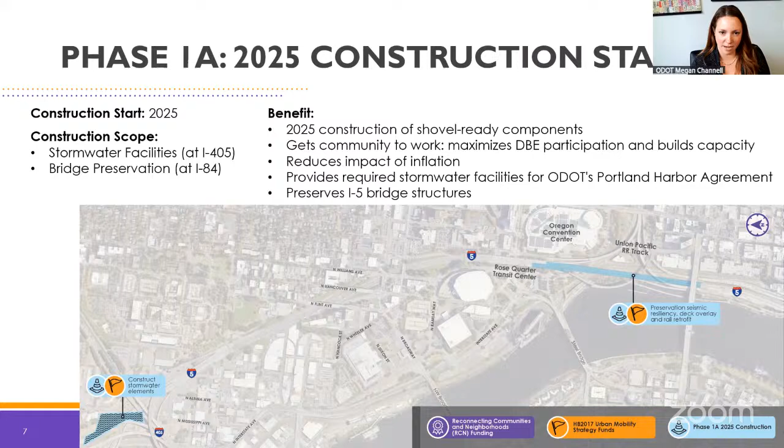On the next slide, the $250 million, or a portion of it, from the commission, in addition to phase 1A, would also fund what we call phase 1, which would follow on the heels of phase 1A, starting in 2027.

This is where we start to compound the work that would be done with the Reconnecting Communities grant. That grant focuses on the first portion of the highway cover at Broadway and Weidler. This additional funding would put some funding into the highway cover, and also implement I-5 mainline improvements with the full southbound auxiliary lane and a portion of the northbound auxiliary lane.

Coupling this work together allows us to build more of the highway cover, and from a constructability standpoint, it's a lot more efficient, reducing impact to the community and traveling public as we construct this all together. So I just wanted to reground HAAB in what the current funding provides us.

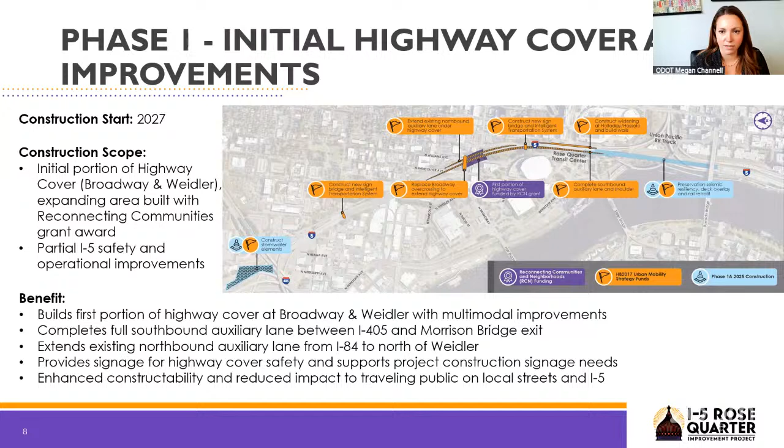On the next slide, I want to zoom in. This image is a plan view of the highway cover area, overlaying against the work that our HAAB did with Albina Vision Trust, looking at how the highway cover and adjacent lands could be utilized in the future for that long-term development and vision in alignment with community.

This is outlining the area of the highway cover around Broadway and Weidler that is funded through the OTC funding, or House Bill 2017 funding, and then the Reconnecting Communities grant. You can see the parcels on cover between Broadway and Weidler, and some of the parcels off cover that would be included in that funding.

So I just wanted to transition that to what it means from a future development opportunity as well.

I'll pause for questions after one more statement: despite these phases being focused on parts of the project work, we still at ODOT, to our highest level with our director, remain committed to delivering the project in full. We see this as a step towards that commitment, recognizing that as funding becomes available, we'll be phasing in the rest of the project, but we stand committed to deliver the project in full.

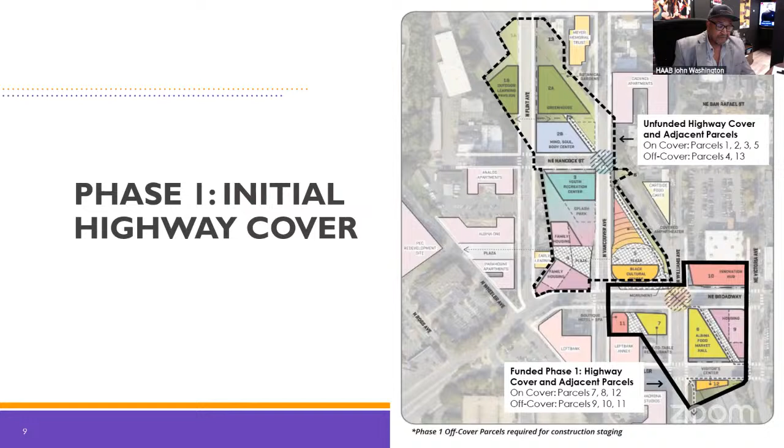Thank you. Any additional questions for Megan before we move forward?

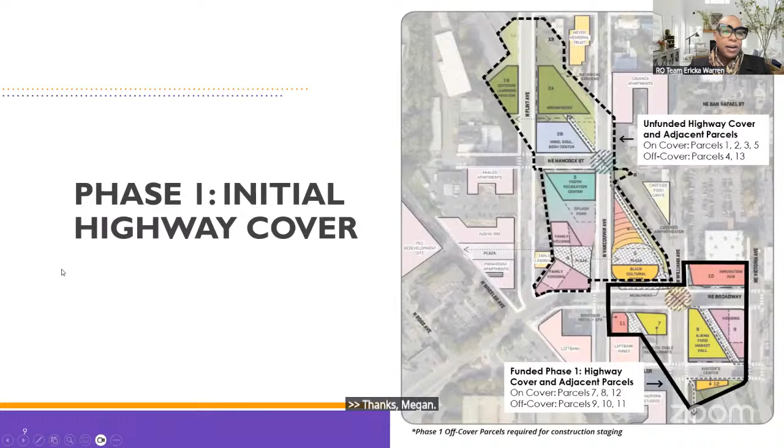Thanks, Ericka. Good evening, everyone. For this, let's go to the next slide. I'm actually going to share this space with Mike Saratella to describe a little bit of a summary of what occurred at the kickoff event for the Reconnecting Albina Planning Project.

Cool. Thanks, Rachel. Good afternoon, HAAB members. I'm Mike Saratella, Senior Planner at the Portland Bureau of Transportation. Many of you were at this event, so I may call on you to share your own impressions and takeaways from that event as well. I saw a lot of HAAB members and folks at the meeting.

On February 27th, about two weeks ago, we held our kickoff event for the Reconnecting Albina Planning Project at Tubman Middle School, just right north of the I-5 Rose Quarter project. It was a great kickoff event. We had a couple hundred people show up, and it went throughout the evening.

We had speakers, both from community leaders, elders in the community, city staff, and it was a chance to really see all these pieces come together, right? So the transportation investments that PBOT and ODOT will be making, as well as private development and building out that street grid, development opportunities on the cap and through the PPS site and other opportunity sites in the area.

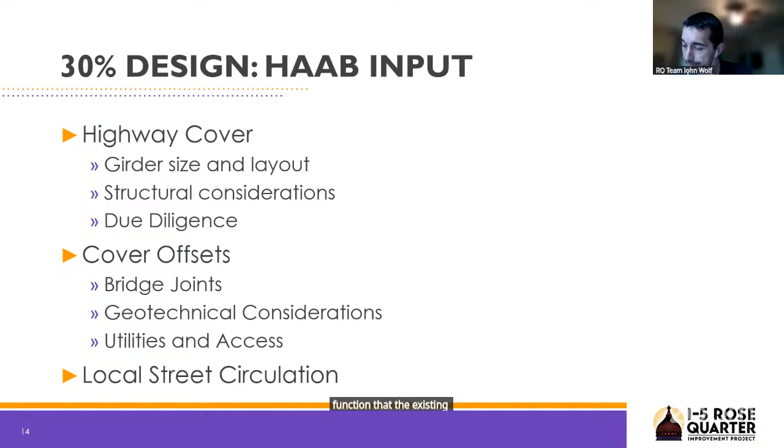If we can move to the next slide - we'd like to acknowledge that as we continue to move the design forward, we're going to continue taking some of this feedback and input we've received, as well as the project values, to help guide additional design decisions in a few key areas.

First being the pedestrian and bicycle bridge aesthetic input as we look at the new connection across I-5 - that pedestrian and bike-only facility across I-5, and how we can use that as a new connection, as well as an attractive facility and opportunity to really reinforce this new community and district.

The tunnel portal aesthetics - as we start thinking of this new structure across I-5, what are some ways that we can blend and optimize the look and feel and aesthetics to create that unique district as we come through the project area. Then we'll continue our conversations around cover use and looking towards that interim or near-term day-of-opening condition that we might want to be designing our highway cover towards.

And then lastly, continuing on local street designs as we move into final design. Up until this point, we're trying to set the key building blocks, the major assumptions that make up our transportation network and the area around, defining our area of impact. As we move into final design, we'll refine and develop the details of those streets and how they complement those intended community uses.

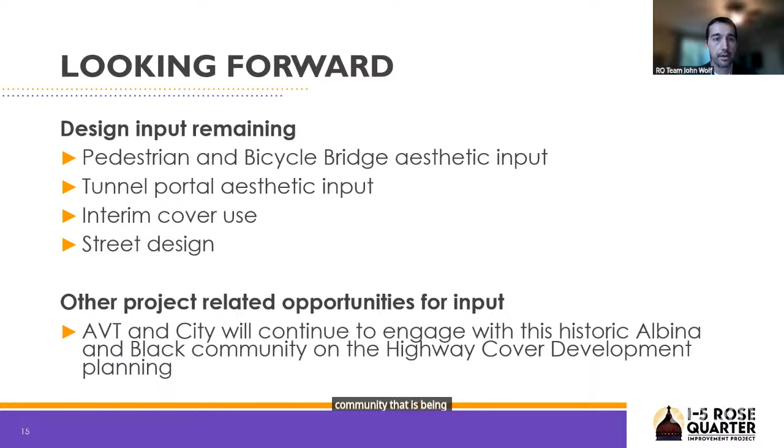If we go to the next slide, we have two main points we wanted to circle back to with this group today: first, our ramp design progression and what we're referring to as an avenue design option, and then a bit more on refinements happening around the bike and pedestrian connections.

We've previously discussed with this group a two-way Ramsay Way design option, in which some ramp traffic would continue along Ramsay Way towards the west, allowing circulation and access to the event area, and then reconnecting and extending west at the Broadway intersection. We also explored an option for two-way Wheeler as a design that would reconfigure the existing Wheeler Avenue and Victoria into a two-way street.

As we explored those options and continued engagement with project partners, a third option was identified that we're now referring to as southbound Williams Avenue. That is the recommended local circulation for this ramp, reflected in the 30% design. It still maintains the primary southbound exit ramp connection by way of the flyover structure that will go over I-5 and reconnect to Weidler and eastbound traffic, but allows and accommodates access for local trips and event circulation to use southbound Williams Avenue to enter the area and circulate on the existing Williams Street and Multnomah Street circulation.

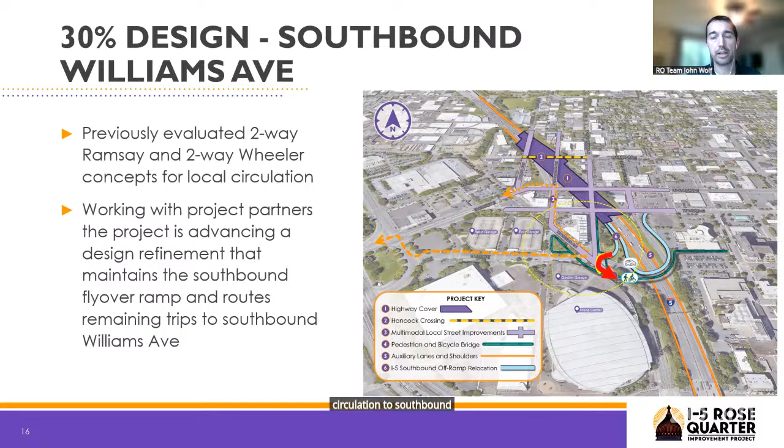If you go to the next slide, it covers a few of the main considerations as we explored, advanced, and ultimately came up with the recommended approach for southbound Williams. As noted, it still maintains that primary connection of the southbound exit ramp flyover up and over I-5, reconnecting to eastbound Weidler Street. That serves roughly two-thirds of the off-ramp traffic and really is the primary movement of auto vehicles through the interchange.

That flyover itself is a significant configuration in which all of that traffic has to navigate through, compared to Broadway, Vancouver, and local streets, which we're trying to create as that unique and enhanced local community space up near and adjacent to the highway cover.

This change also simplifies some of the circulation that was being explored along two-way Ramsay and two-way Wheeler and reconnecting to the Broadway corridor. It brings those trips into a more direct connection to Williams Avenue and Multnomah Street, and still provides access for those trips to come back and re-enter the event district, which is really where a large volume of trips using this ramp would be looking to access.

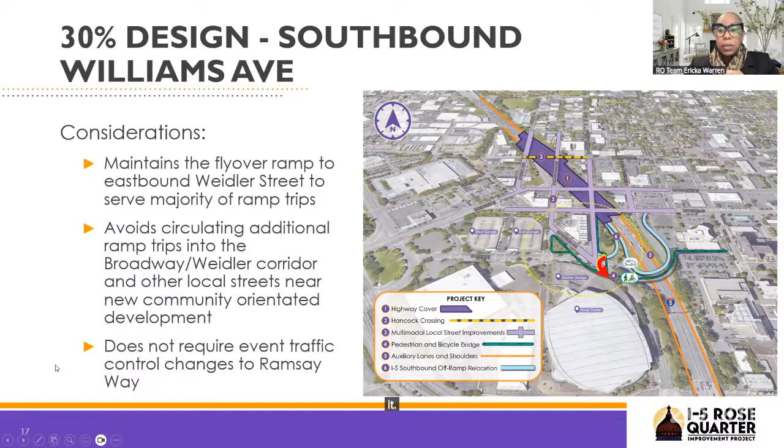Excellent questions, thank you. John, I'm not seeing any additional questions. Okay, well, we have two more slides now related to the bike and ped overcrossing, and then if any other questions come up, we can circle back to that.

So similarly, we wanted to report back on the refinements and design approach for the new pedestrian and bike overcrossing. The focus today is on the western touchdown, or the western connection, as you get across I-5 and try to get back to the existing network. At a high level, this separated bike and pedestrian facility is really looking to create a safe and comfortable location for users trying to cross I-5, getting them away from some of the busier streets. It's also serving as an extension and key link to the city's planned Green Loop, meant to bolster users' abilities to navigate throughout Central City on a safe and effective pedestrian corridor.

So currently the design was looking to touch down in the area we've referred to as the Green Triangle, which is an open landscape space between Wheeler Avenue, Ramsay Way, and Center Court. As we've looked at that option, its considerations, and its connectivity to Ramsay Way as the potential green loop route, we've identified some challenges with what modifications would be needed to Ramsay Way, as well as the functionality of that as the primary connection.

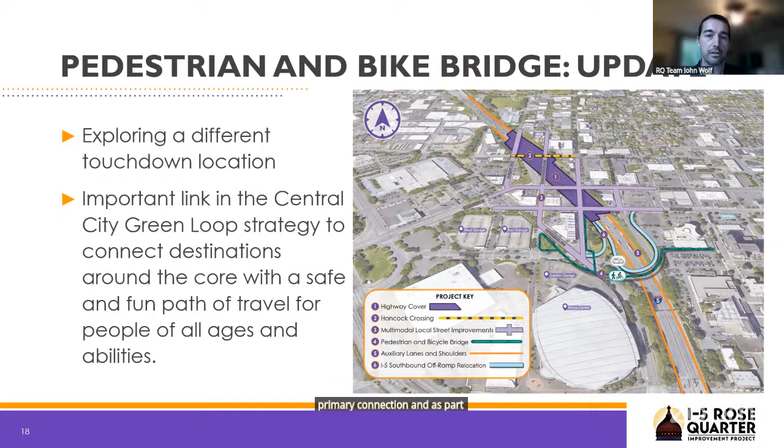As part of that, working with the City of Portland and the project team, we've identified a refinement to that western touchdown. If we go to our next slide, what we are looking at exploring to implement within the 30% design is a western touchdown that would now extend up to Weidler Street and the Broadway corridor, as we've learned more about the Lower Albina Streetscape project and the enhancements being planned for Broadway Weidler.

This would create a more attractive environment for that to function as the high quality facility the Green Loop is intended to be. We're looking at bringing that western touchdown up to Weidler Street along the existing Wheeler Avenue, while also providing a direct access point for those destined to the Moda Center or Event District via a staircase connection at the Green Triangle. This refinement is consistent with the vision of making Broadway and Weidler a more attractive space for people to navigate on all modes of transportation, while still providing that primary event access option for people to bypass surface streets interacting with automobile traffic.

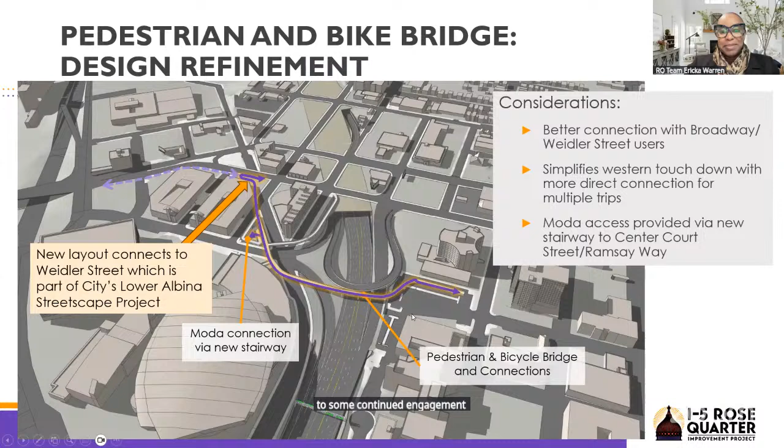Thanks, John. Appreciate your work and helping us understand where you've incorporated HAAB input and community input regarding pedestrian and bike safety. I wanted to take just a moment to share with you all our look ahead for engagement with you, as well as some of the additional community members identified in our extended HAAB engagement, as well as the COAC.

As our colleagues at the city mentioned earlier, we will be updating your calendar invite to include you in the city-led RAPP session on April 24th. Mike, I see your hand, did you want to jump in quickly? Very quickly, I just would add that we are looking at a virtual option as well for the city-led meeting. Yes, yes, indeed.

We realize that everyone cannot be in the space. We are excited about being in person, as that personal touch and engagement has been so critical and helped us move the work forward. So again, April 24th, planning for a hybrid meeting. Those who are in the Portland Metroplex, we would love to have you in person, as that engagement is just so interactive. We'll be talking about the Reconnecting Albina Planning Project and seeking your input, as well as COAC members and your invited guests who participated in our HAAB extended meeting.

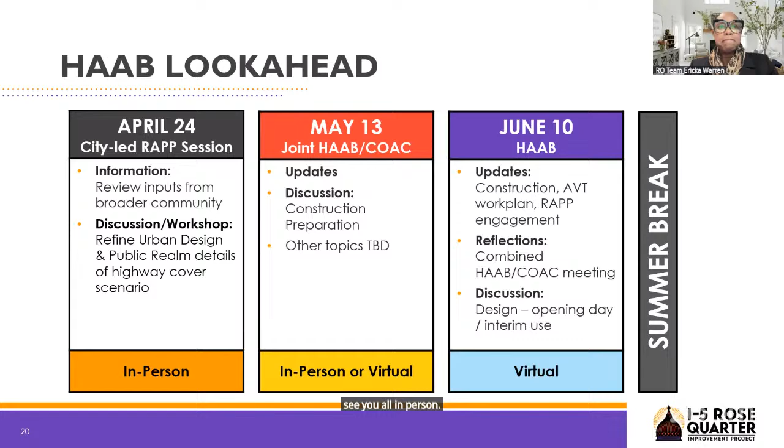We thank you all for joining us. We are trying to be efficient and considerate of all of your time. Again, I just want to reiterate our appreciation for continuing the work. You all aren't new to this, as you all have been advocates in this community for much of your careers and lives, if you will. So Dr. Holt, if you'll close us out, we would appreciate it.

Excellent work, Miss Ericka, as always. Tiffany, welcome into the space. What a moment. Thank you so much. Thank you. I'm happy to be here.

Yeah, we're glad that you're here. You jumped in at a critical time of lift and leadership, right? Yeah, critical, yeah. You guys have done a lot of the work, so I feel like I get the easier road, but it's still a work in progress.

Yes indeed, my closing thought is merely that we're at a critical point and an interesting point, and what crisis often provides for us is a pull on the creativity that is within us. And we who have lived in Portland, especially those of us who are people of color, know what it is to have to address and adjust and deal with things we didn't anticipate in order to move things forward. And so for the Historic Albina Advisory Board, this isn't new, this is the reality of what we've lived in.